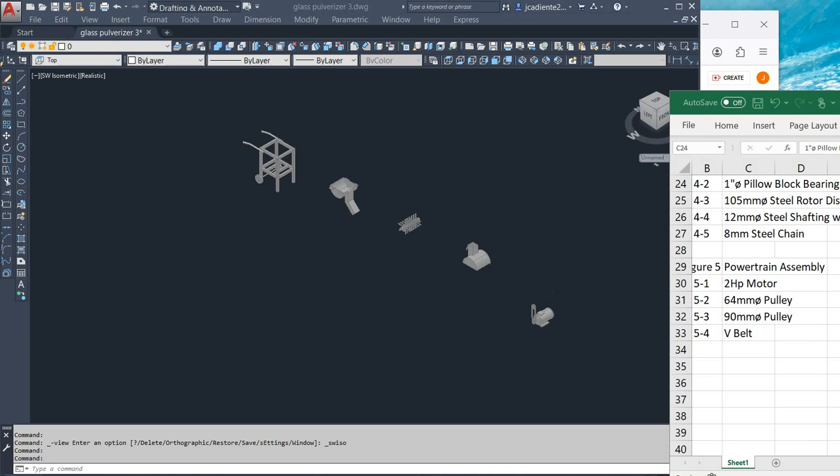Okay, so now let us put it all together. The first thing we assembled is the frame. We fabricated the frame assembly first. Then we fabricated the pulverizer assembly next. And then...

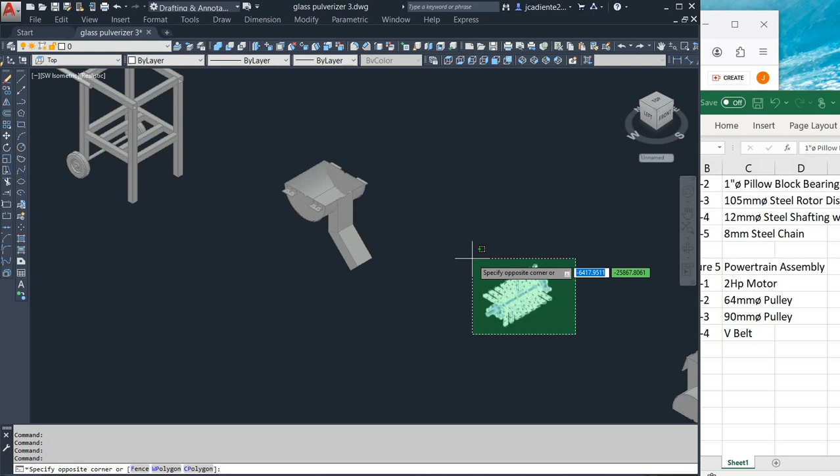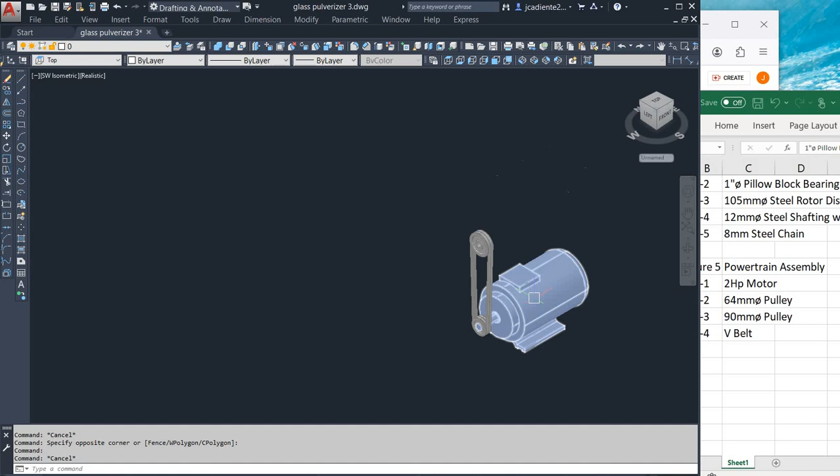...the lower housing, this one. Then the upper housing. And then finally, the powertrain. Actually, for the powertrain, you don't need to fabricate this. All you have to do is put it all together.

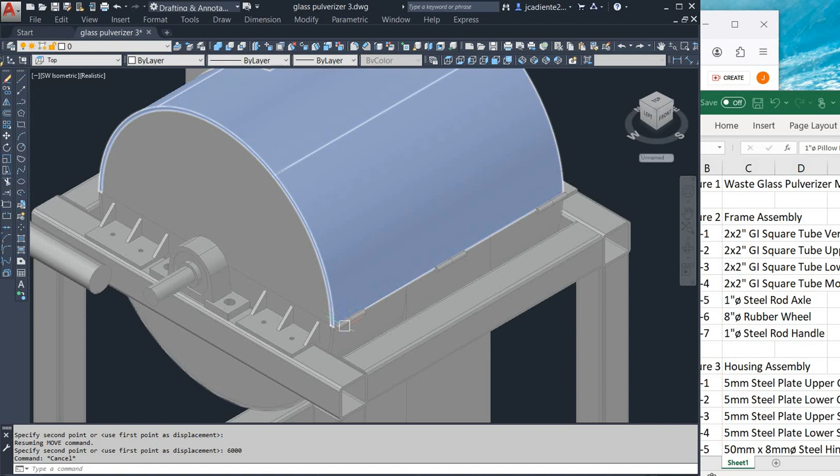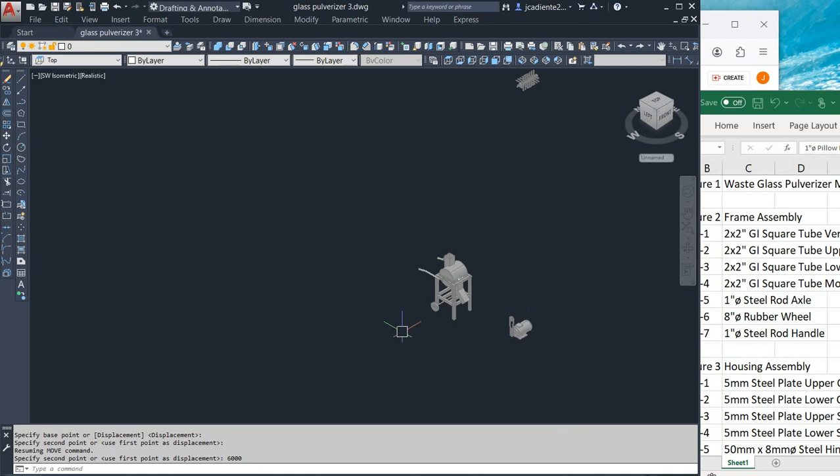And then, finally, we'll install the powertrain. Okay, so first, for the powertrain, we'll mount the engine on the engine support.

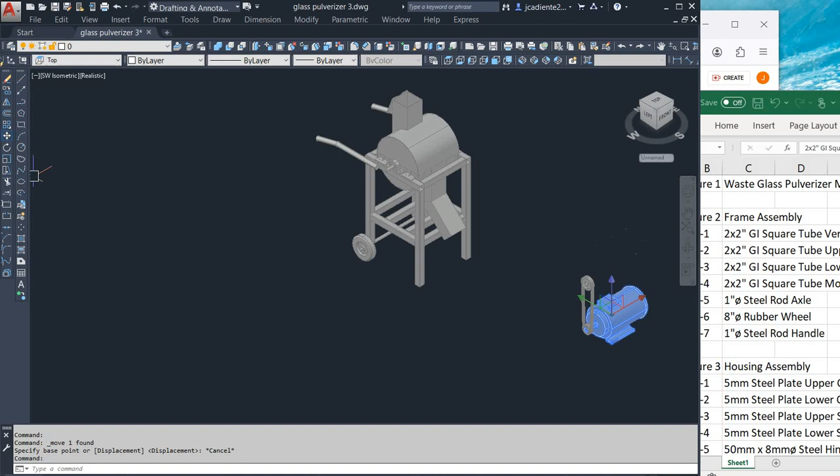The engine support, or the motor support. This is the 2x2 GI square tube motor support. We'll place the motor there.

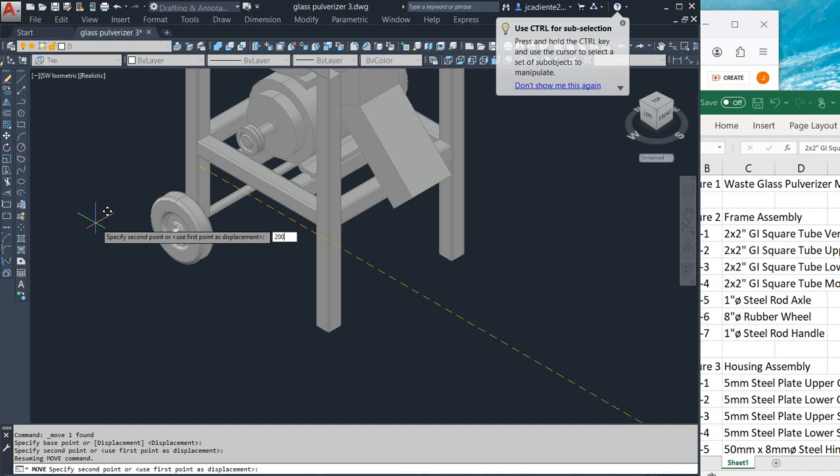Next is we'll install the smaller pulley on the motor, then the larger pulley here on the axle of the pulverizer.

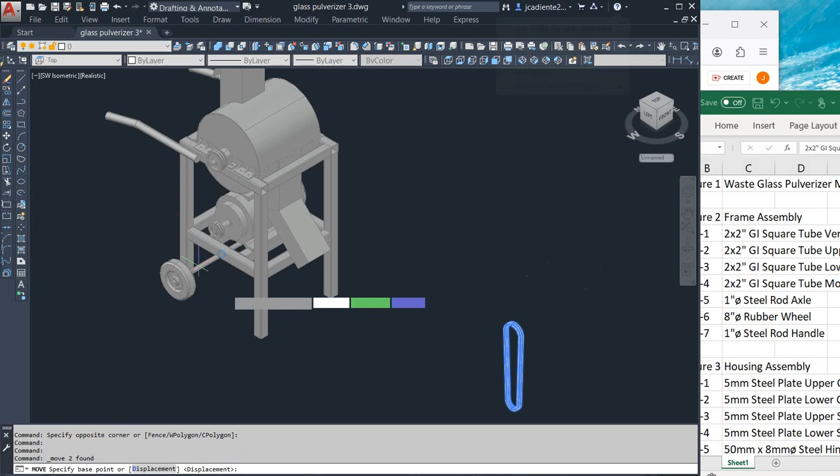And then finally, you just connect the belt or install the belt. And then you just turn on the motor and it will start crushing.

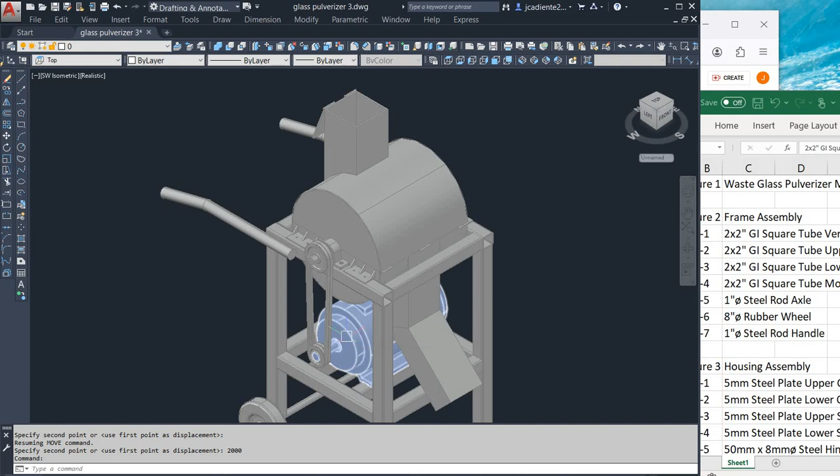Then, once the motor is running, it will transmit the power to the smaller pulley, which will turn the V-belt, which will then turn the larger pulley attached to the axle of the pulverizer.

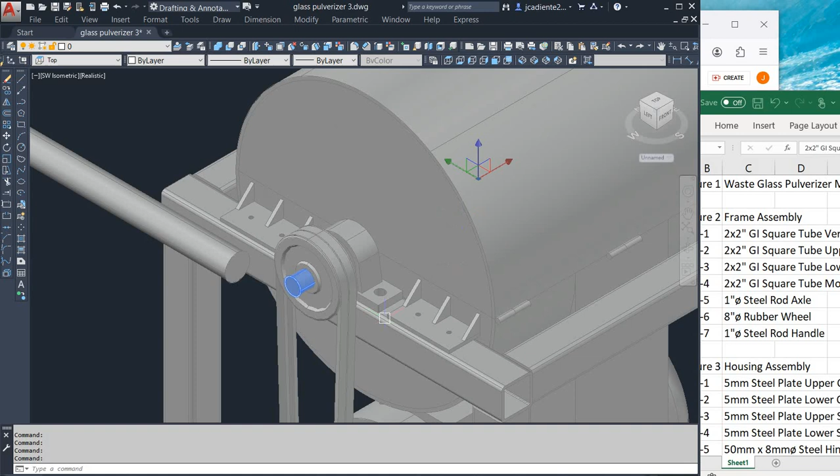Now, the chain inside the pulverizer assembly will start spinning. And then, that's the time you shoot in the glass particles.

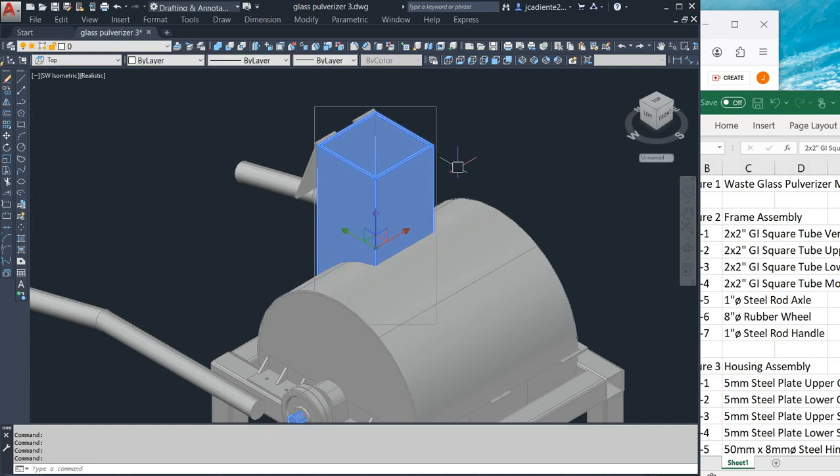Okay? Then, you can cover it so that no glass particles escape, for safety reasons. And then,

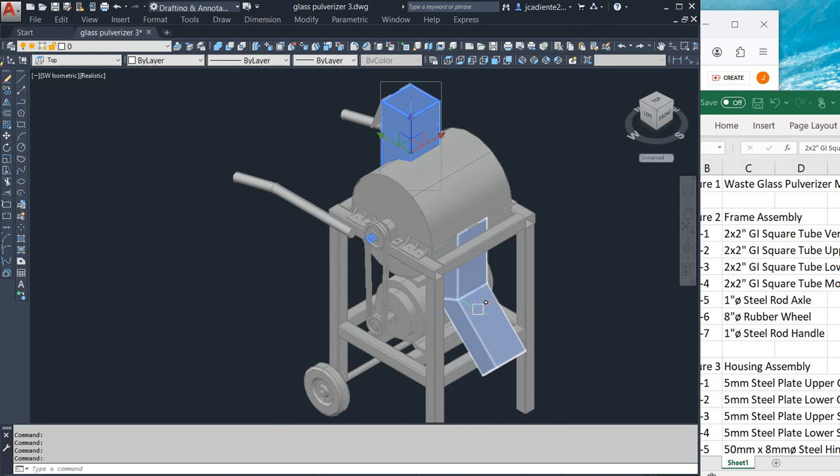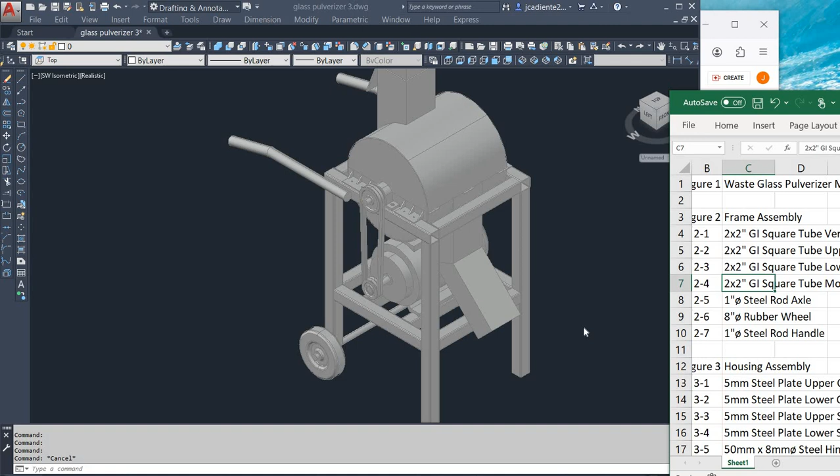Okay, so that's it. So that is the completed fabrication of the waste glass pulverizer machine. So thank you very much. I hope you enjoy the show.